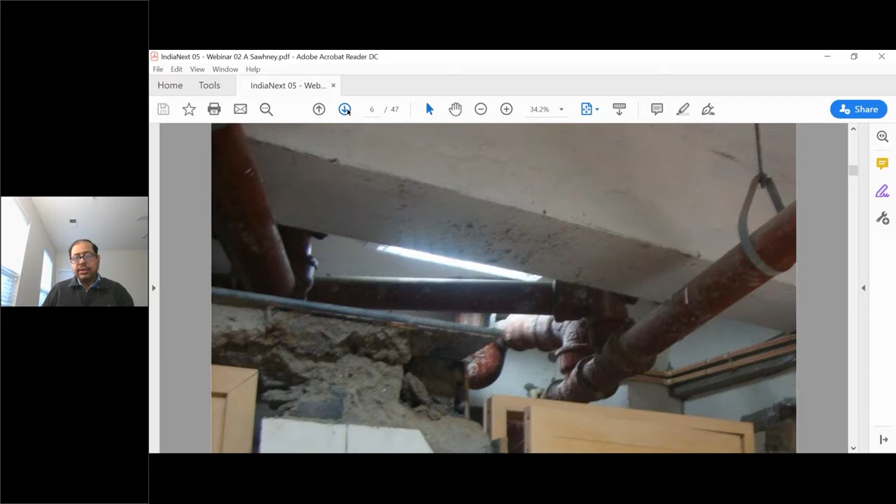The sticks and bricks approach, which we all know has numerous challenges, a lot of rework, a lot of waste, such as this you're seeing on the screen, cannot really continue, because if you have to accomplish the goals set by India in terms of housing units needed, this traditional sticks and bricks approach would not work.

As a sector, we must transform and modernize ourselves. This call for modernization has been a constant calling. It is there to meet the demands of the society. If you have to build so many housing units and other horizontal and vertical projects and assets, there is clearly a need to enhance and improve the way we work.

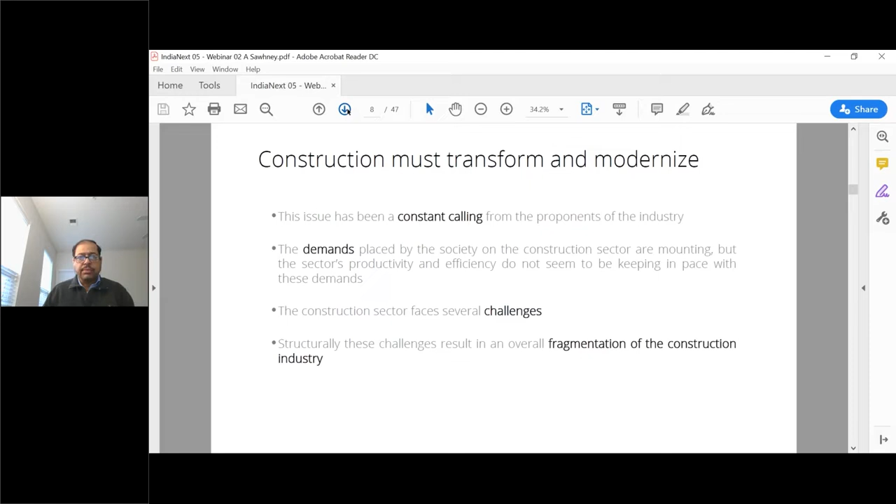The sector itself faces numerous challenges. We have fragmentation within our sector that needs to be addressed also. So, to me, that really translates into transforming our sector.

The transformations that we need in our sector, I divide them broadly into three. We need to relook at, reconsider how we construct or fabricate. When I say that, I also mean how we design, how we construct. So we need to relook at that process itself. We also need to enhance the way we develop and use digital technologies in our sector.

And simultaneously, we must also address how we procure and deliver, because any transformation in design, construction, use of digital technology must also be simultaneously led by improvements in procurement and delivery.

So, is this the answer? Can we continue to tinker and have incremental improvements? Can we have a gold plated wheelbarrow and assume that our productivity gap would change? Will we improve our sector holistically? I don't think that's anymore the answer. We have done all the jugaad and the incremental improvements in our traditional way of working. We must now undertake a much broader and holistic improvement as a sector.

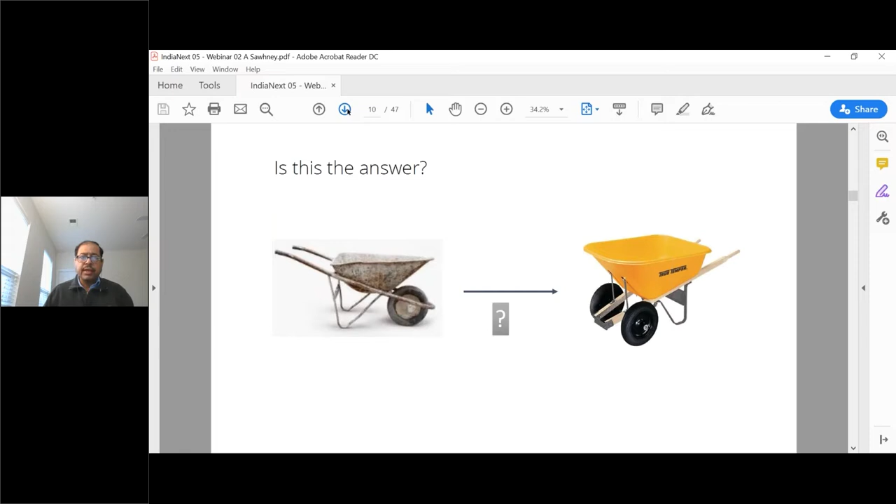And I think that this competition, the IndiaNext challenge, is brilliantly poised to help us rethink. You get a canvas, a fresh drawing board on which you can take some of these ideas, perhaps not all that I'm going to share with you, but some of these ideas, and put them into practice, come up with an innovative, creative idea that creates a sea change and makes the improvement in design, construction, in digital technologies, and in procurement and delivery that we need as a country.

So, what's happening? This is not something that's happened all of a sudden to us. In a way, COVID has played a significant accelerator in the use of technology for our sector. In the past 2 years, we recently did a survey in which we found out that because of COVID, on-site productivity further dropped by about 11 to 20%.

So if you talk to anyone, because of site closures, reopening of sites, safe distance, and many other health and safety measures that are very much needed, have led to some drop in productivity, some drop in supply chain, material prices have increased, and many other challenges have been compounded for our sector.

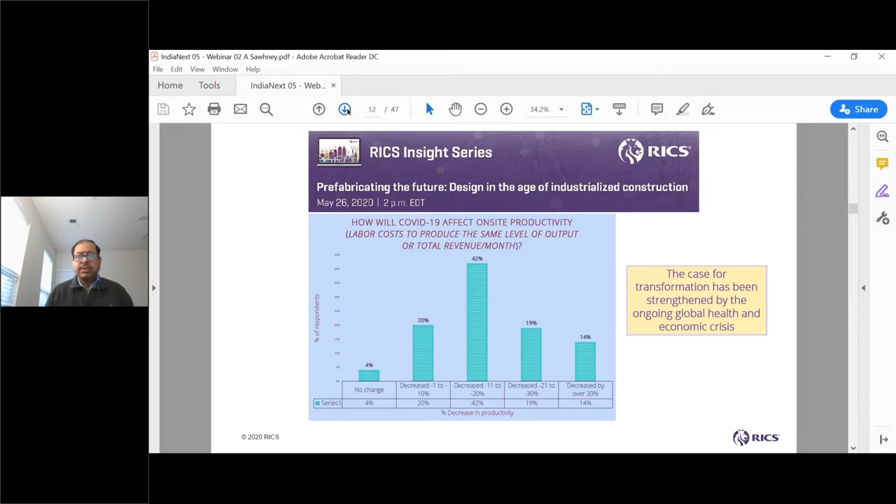So, what we have done brilliantly, I feel, all over the world as a sector, have quickly transformed and adopted sort of these modern methods of construction, adoption of digital technologies, and really started making a good, significant progress.

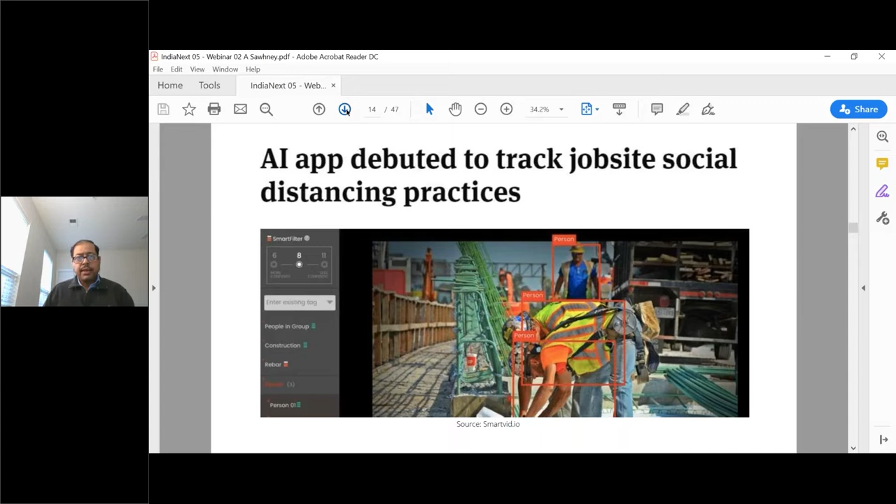There are now artificial intelligence applications taking place all over the job site to do computer vision as well as image processing to make decisions, especially related to worker health and safety. We are seeing virtual inspections take place where physically the inspector does not need to be on site. You can use a laser scanner, 360-degree video to actually inspect the site.

And this was happening, but I think the acceleration is significant. Coincidentally, I found a report which is pre-COVID, and Balfour Beatty talked about how in 2050, likely there will be no humans on the construction site. I'm not sure if I'm completely bought into that idea, but you get the point that we will have lots of remote work that could be done, robots deployed, and other kinds of technology and automation deployed on our sites.

So from a very sticks and bricks approach, already the journey towards a much more modern way of working, adopting a new operating system is already underway, and we are seeing great examples of that take place.

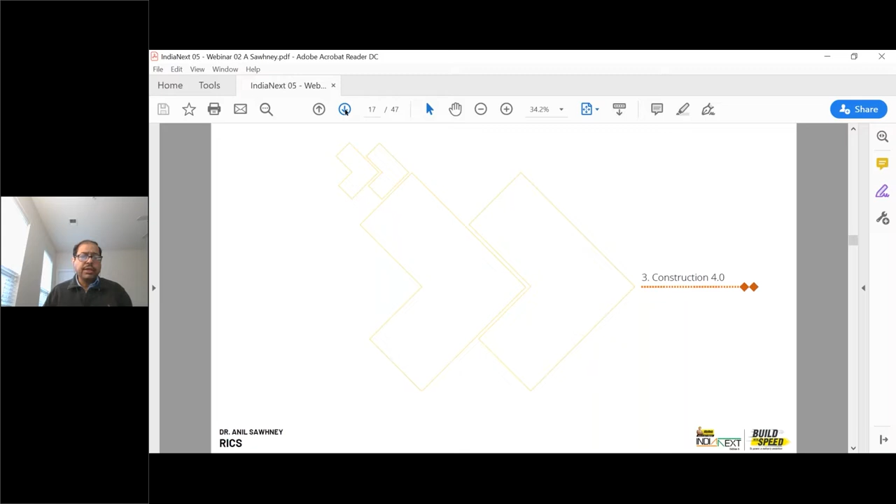So in order to fully understand this transformation, we have come up with this terminology called Construction 4.0. It's a paradigm or an operating system that views the three transformations that I talked to you about earlier on, get connected in a much more holistic fashion. So essentially what we are saying is take what the other sectors are doing, Industry 4.0, adopt and adapt that to construction, and we are calling this Construction 4.0.

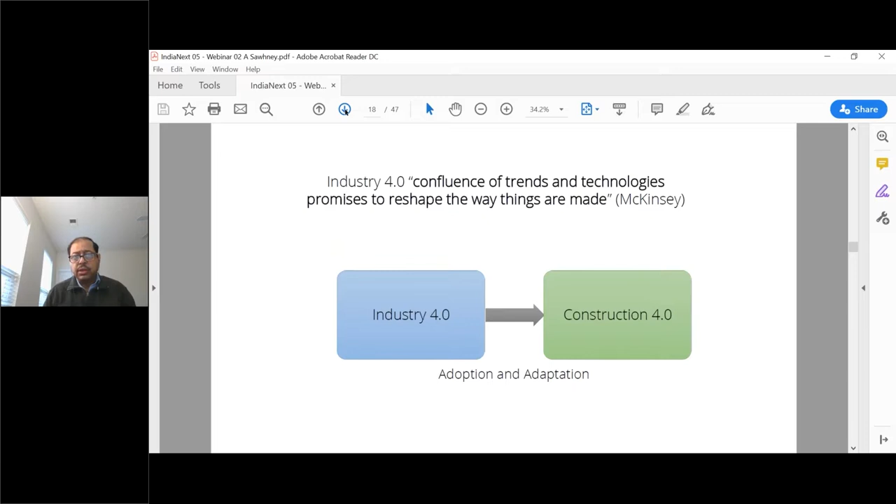You can call it industrialized construction or any other similar term. What Industry 4.0 does, it is essentially a confluence of trends and technologies that promises to reshape the way things are made. So it just changes how you produce various widgets and products. Can we take that high level thinking, adopt and adapt it to construction, call it Construction 4.0, so that we can rethink how we design and construct, how we use technology, and how we procure and deliver?

Our definition of Construction 4.0 is that it is a paradigm that uses cyber physical systems, also now called digital twins, and the Internet of Things, data, and services to link the digital layer consisting of building information model and a common data environment, and the physical layer, which is essentially your asset that you're constructing, but considered over its whole life, to create an interconnected environment integrating organizations, processes, and information to efficiently design, construct, and operate assets.

So in short, what is Construction 4.0? It is a paradigm or an operating system. What does it use? It broadly rests on two technologies: cyber physical systems, and Internet of Things.

How does it work? It works by connecting your digital layer, which is your BIM model or any other virtual representation of the asset you're building, during design and construction, to the physical layer on site. Initially during design there will be nothing there, the physical layer doesn't exist yet, but as it starts coming off the ground, you connect that physical layer with the digital layer.

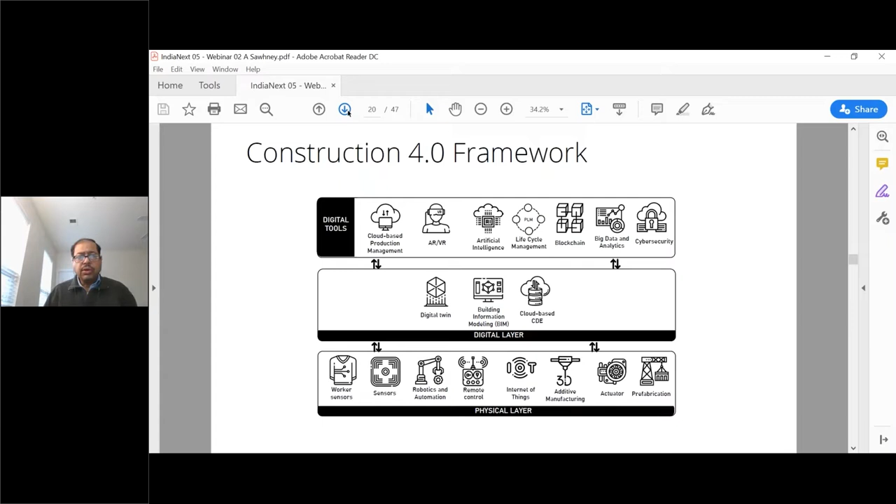Sitting in between is the digital layer. This is the digital assets that you're producing during the design and construction. You could start with maybe a building information model or any other virtual representation of the design of that asset, stored perhaps in a cloud-based common data environment, and slowly people shifting towards the use of digital twins as well in the digital layer. So these three layers are interconnected and are helping shift the way we design, construct, and then hand over, operate, maintain, renew, and end of life our built environment assets. That's sort of the graphical representation of the framework.

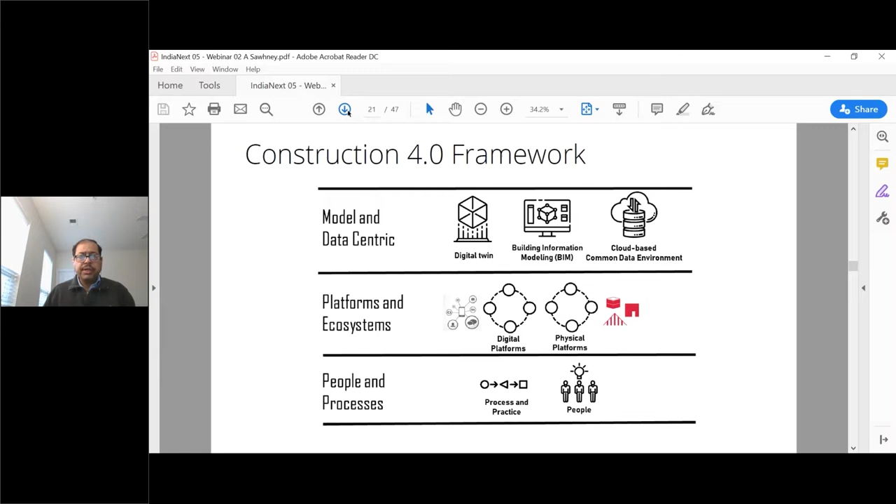The framework itself would utilize model and data-centric work practices. We'll use platforms and ecosystems, and I'll explain further what these platforms and ecosystems are. And then people and processes, which have the fundamental layer of any operating system that you want to have for construction, because without people, no matter how much technology you deploy, really you can't make a difference. So keeping that as the foundational layer of people and processes, the Construction 4.0 framework essentially helps you move in the direction of build with speed and bring about very important changes, much needed changes in the sector.

So you may be thinking this is all sci-fi. I think maybe not many of you would be thinking that, because some parts, some technologies you're already using. But more importantly, you will see the recognition of this in a recent article by IIT Guwahati director, asking why can't construction, architecture, civil engineering that helps shape our society and act as an economic engine for our nation, why can't we be at the forefront of using IT, robotics, AI, and IoT? Why can't these tools and technologies be used to build the basic infrastructure, the social and economic infrastructure for our society? So that tells you that we are already on this journey of utilizing these technologies.

What I present to you is a holistic framework for thinking this through, rather than just embarking upon using BIM or using AI. Why not think more holistically about a paradigm or a framework or an operating system and bring all of these trends and technologies together in a much more systematic fashion? So that's sort of the overview of the Construction 4.0 framework.

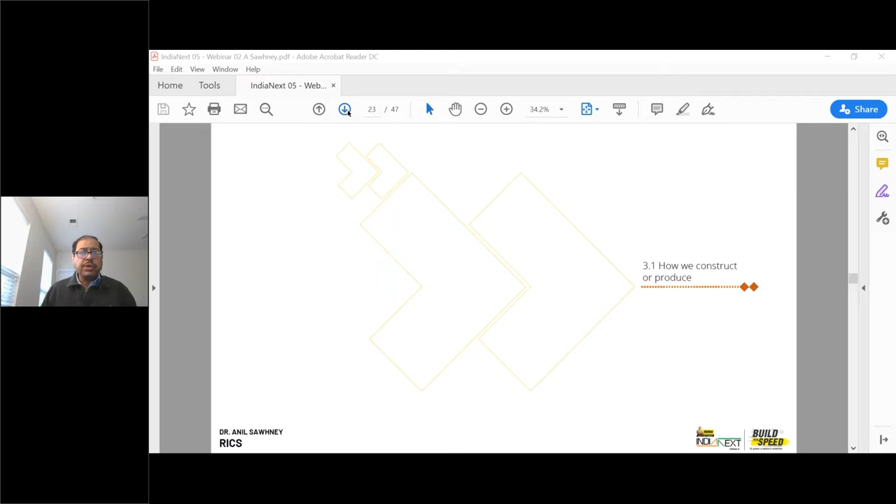So then my first question was, how do we change the way we design, construct, and produce? Really, we need to take a very product-oriented approach, what I call productization.

Let's say we're looking at this very simple, affordable housing block. During design itself, why can't we take a more product-oriented approach rather than designing something and then figuring out what the construction means and methods of that would be? Why can't we upfront utilize a productization approach and think of building in terms of modules that can be repeated, not only on this project, but perhaps produced and used across projects. That's the approach called productization. Some parts and learnings from productization can be used in our sector.

One of the techniques that the manufacturing sector utilizes, you can take shipbuilding, you can take car manufacturer, they all utilize this productization or product-oriented approach. To drive the design in a product-oriented setting, we use something called design for manufacture and assembly. So while you're designing, you're thinking about construction, operation, maintenance, renewal. Our architects, who are already at the forefront of use of technology and innovative thinking, could start thinking in a product-oriented manner and think of modules rather than go down to the sticks and bricks approach.

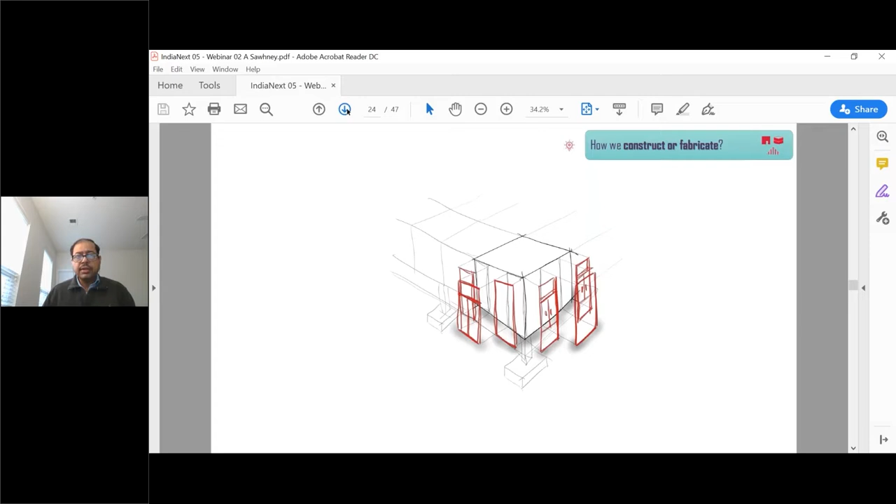Why not think of products that can be utilized? You can think of these products, and I know one of the challenges in India would be remote locations. So you can think of these products, which could be 2D or volumetric, even in terms of transportation—because while I was working with Shailesh in India, one of the challenges was that the infrastructure to do off-site and near-site prefabrication, even the road network, may not exist. So think in terms of transportation while you are designing, even in a product-oriented approach.

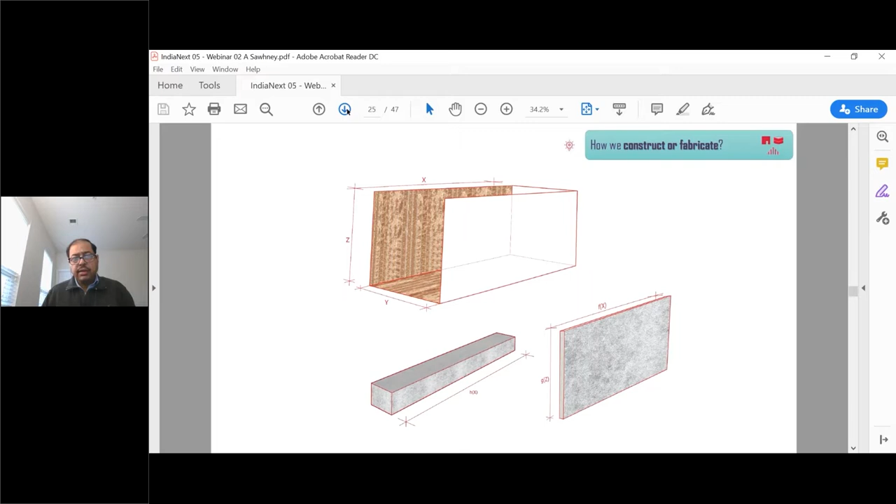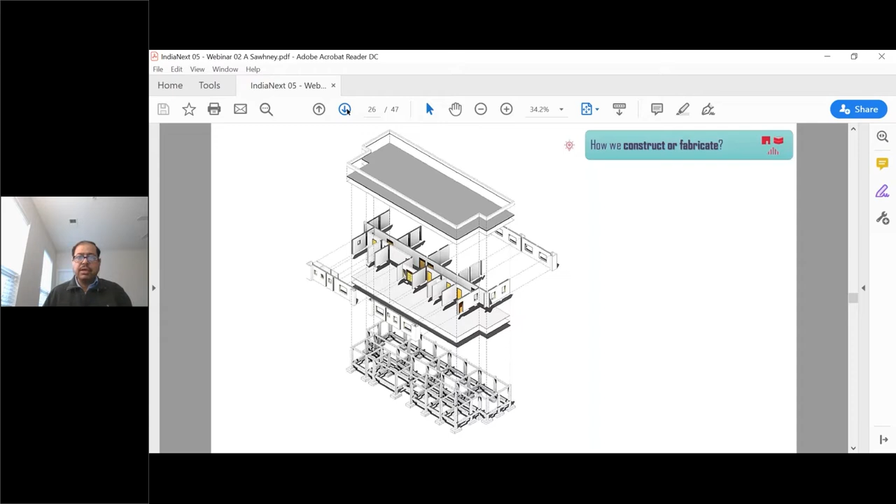So if you had a simple building like this, could this be exploded into parts that can be manufactured either on site, near site, or off site, and then assembled? I'm not saying 100% of the building could be that way, but perhaps we can start increasing what we call the pre-manufacture value of this building—the percentage of the building or infrastructure. Can it be increased? Let's say today we use 10% products, can we increase it to 50%, 75% from a kit of parts, from a productization approach? Can that be accomplished? And if so, would that change how we design, construct, and fabricate?

So this is a project that we did with GAIL, where we looked at one of their pigging stations and came up with this idea of designing with products, designing for manufacture and assembly. You can look at various parts that could possibly be standardized—not all, again, not 100%, but some of it could be modularized, could be productized, and we could shift the way we design, construct, and fabricate.

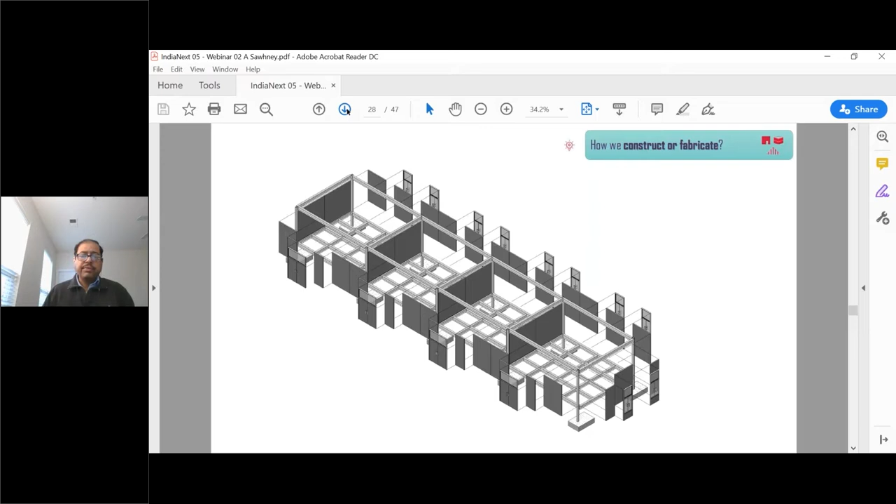We could even look at flooring and roofing components rather than just looking at walls. You could look at volumetric, you could look at 2D panels and other kinds of components. But I think that thinking must be gelled with the way we currently design. So a designer pushing down the road the means and methods of construction—we need to bring that up front and design for manufacture and assembly.

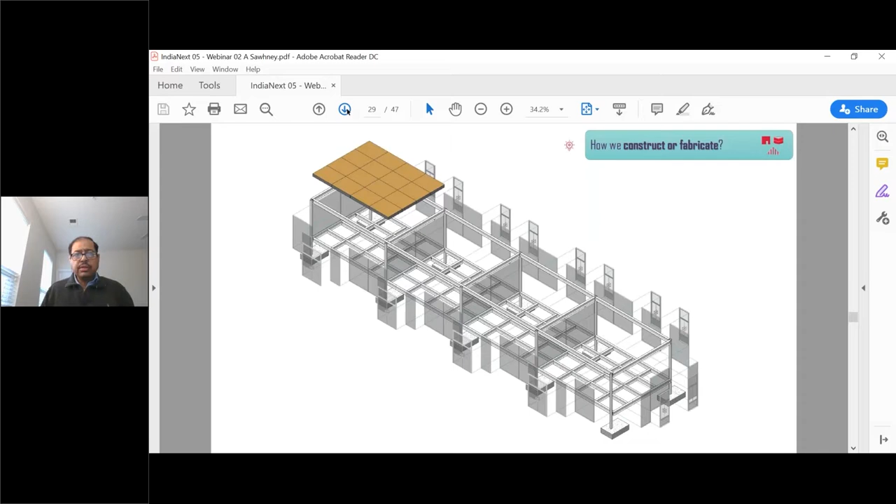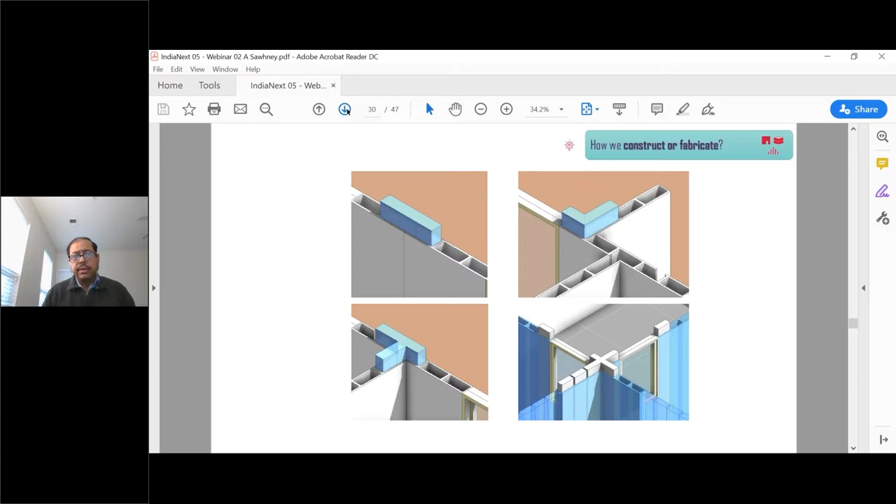You can then also, in this productization approach, design the portion that will take place on the construction site. So let's assume we came up with 80% of the building that could be manufactured off-site. You can also design the in-situ assembly of those components. In this new way of looking at how we design and construct, you can also practically look at the ways of assembling on site in a much more efficient fashion. And this is already happening—it's not something new.

You look at Australia, the Ministry of Education or the school infrastructure in New South Wales, working with two leading companies globally, Mace and Grimshaw—you may have heard of them. They're doing a lot of innovative things, and have come up with a platform essentially of products that can go into a school building. We know school buildings are very crucial. The design of the school building has an impact on the learning and kids' outcomes in terms of their behavior, growth, and learning. So could we possibly look at school buildings and come up with a platform of products, very much like a platform of products that a car manufacturer or a shipbuilder uses today?

If you go to a shipbuilding yard in South Korea, they don't design every piece, every part for a ship. It's already sitting in a product database, and they can configure, combine, assemble all of these assemblies together to come up with a unique, customized ship, for let's say, an oil tanker or a cruise ship.

So could we similarly adopt those design for manufacture and assembly principles and come up with a product platform from which, for a new school building, you can derive these parts and put them together into a really uniquely designed school building? That's sort of the approach in construction 4.0 that we feel is crucial.

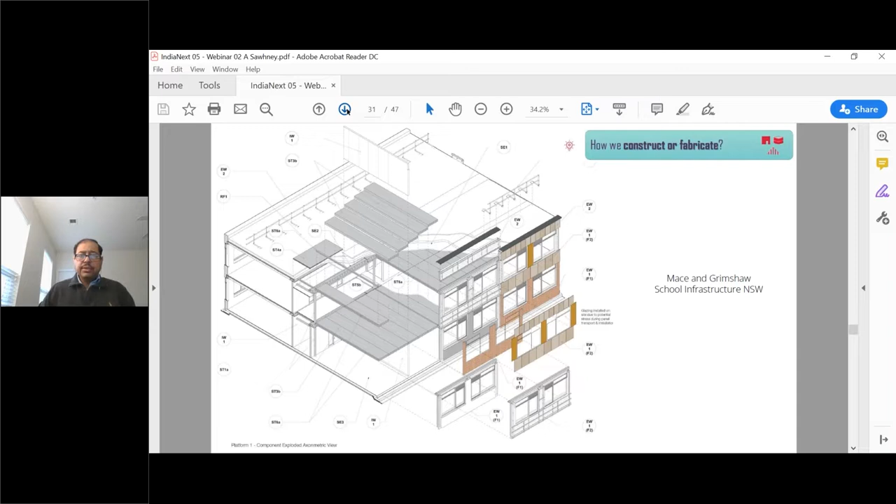Another example, this is the UK government, and they are also doing product platforms. You can have product platforms for various types of buildings. I think the application there is for the Ministry of Justice, for various prisons, jails, and those kinds of buildings. They're working with Bryden Wood to come up with a product platform.

So this is an example of product platforms that can be standardized, which can be combined to create sub-assemblies, and these sub-assemblies can go into buildings and other types of infrastructure to produce built assets that we really want to look at.

So what I'm really sharing with you today is three things: a product orientation or productization, a platform-based approach. Could we look for a subsector within construction? In this particular case, could we look at affordable housing and come up with a platform of products? I call it a physical platform from which we can take those parts and come up with unique housing solutions.

In which the entire process has been thought through from manufacture to assembly to construction, and perhaps even beyond in terms of occupancy, how the asset will behave over its entire life cycle. And thirdly, DFMA, design for manufacture and assembly. Very important. If we were to shift towards a product-oriented approach, could we possibly look at DFMA as a principle that can be utilized in changing how we construct or fabricate?

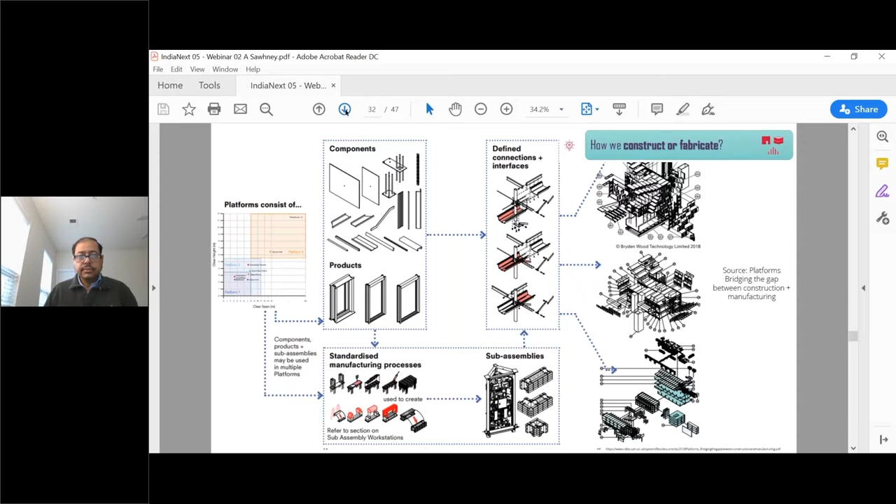So the second transformation that I had laid out for you was, how do we better build digital tools and how do we better use them in our design construction process? I think digital tools together can help us solve many of the inefficiencies and productivity drops that we have in our sector. All of you have seen, India has made significant progress in the use of building information modeling.

Building information modeling combined with a cloud-based common data environment, which is available to various project team members, makes the design and construction process efficient. And today, the discussion has shifted to the use of digital twins. There's sort of a flavor of the month situation, and everyone is talking about digital twins. These digital tools together can be utilized by our sector to bring about horizontal, vertical, and longitudinal integration.

Think of it in very simple terms. Today, data and information in design and construction does not flow over the life of the project. Many a times, design information is inefficiently passed over to the construction phase, and then very inefficiently in the handover process from construction to the use phase of the built asset. If we utilize digital tools in the right way, we can integrate across the life cycle steps of a built asset.

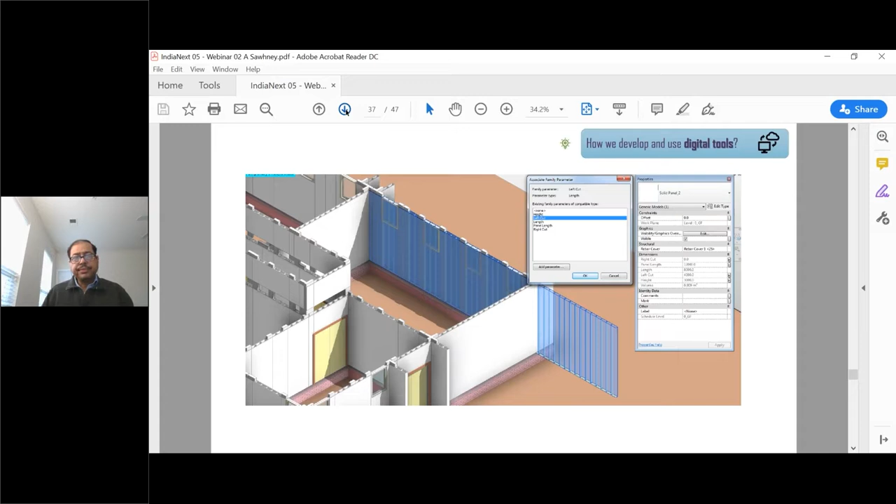Here's another example of how these digital tools come into play when you are designing and perhaps even constructing. As we saw with products, there is this idea of product platforms. You saw how the Australian state of New South Wales is looking at the education sector, school buildings, and using product or physical platforms to improve the design construction process. The same can be done in the digital world also - you can produce digital platforms and ecosystems that can help the way we develop and use digital tools.

Think of this as your Uber, or think of this as your Apple iOS or Android phone. The phone comes with an ecosystem or a digital platform. The iOS today has many add-ons available to you. So if today, for example, I'm an iPhone user and I want to monitor my heart rate, I can buy a physical add-on, I can buy an app, and I can extend the digital tool - my iPhone and the iOS - to do that very thing for me.

If you think about it, it's a platform where a developer can go develop a physical add-on and an app, which is a digital add-on, over that platform and deliver products and benefits for the end user or the consumer. The same approach can be applied in design and construction also. We can utilize digital platforms and ecosystems for the construction sector as well.

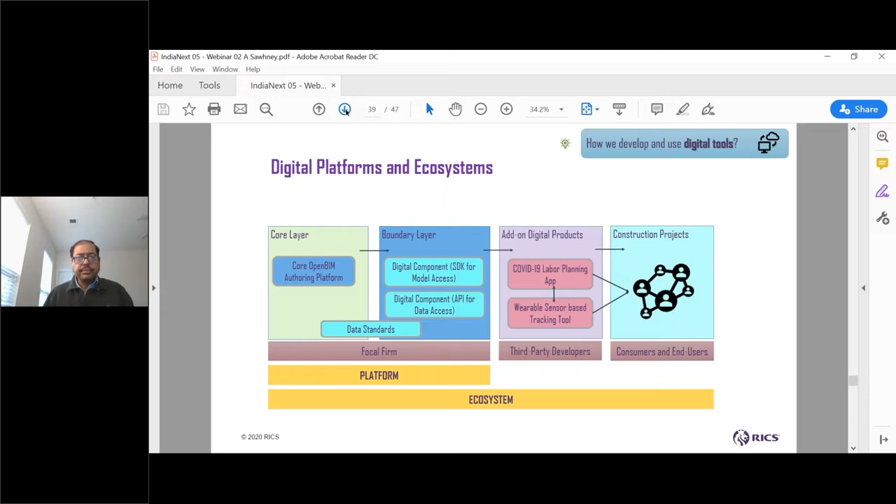Lastly, we raised the third question: how can we improve and change the way we procure and deliver? Because no matter how much innovation you can do in design and construction and in the use of digital technologies, if you can't procure these innovative ideas into your projects, it's going to be very challenging. I think along with the sticks and bricks approach, the lowest bidder or lowest first cost regime must also change. We need to rethink how we can change the way we procure and deliver on our projects today.

Today, we do it in a very transactional fashion, an approach that is very adversarial and causes many of the inefficiencies we discussed early on, because of the win-lose adversarial approach we currently have in transactional ways of working. This can be shifted into enterprise models where you have much more collaboration and coordination.

I know it is difficult to implement on public sector projects. You have various procurement guidelines, perhaps laws and regulations that may make it difficult, but that should not be the barrier to making improvements to the way we procure and deliver.

Obviously, we progress from an enterprise model to a lean delivery model to a much more integrated project delivery model, where you look at value, you look at the whole of life, the whole of the asset, rather than a very microscopic view of let's get it designed, whatever the quality of the design, let's get it constructed, and then have so many inefficiencies and waste in the process that you've lost the very benefits you may have gained from procuring in a very regulated regime.

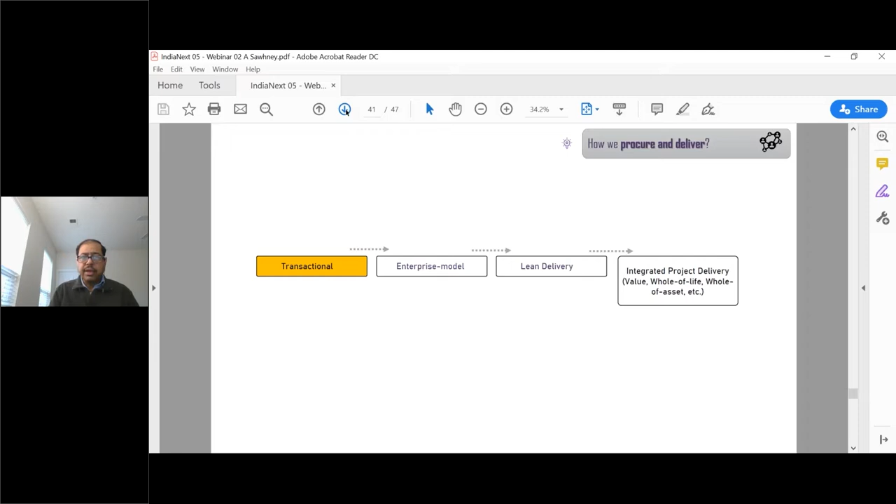So I think some thinking is needed, but obviously this is perhaps very challenging and difficult to accomplish. But that doesn't mean we can't bring in best practices and learnings into this. And some of this is already happening as part of my day job.

My colleagues in the UK are working towards a toolkit which has been launched, called Procuring for Value. So rather than procuring for cost, can we procure for value? In the initial stages, can we take an outcome-based procurement approach to drive our capital program delivery and the lifetime performance of the assets?

Can we increase transparency on the performance of the suppliers and assets? Can we improve procurement efficiencies and get the basics right?

In this particular case, and this has now changed slightly, when you're setting up a large capital program, especially in the public sector, could there be a weighting system where you can look at all aspects rather than just the financial aspects? Could you look at the natural, social, human, and manufactured capitals also, rather than just looking at the money?

Could we look at ways of procuring in which carbon, resource use, production, and productivity are all optimized rather than just looking at the first cost of the design construction process? So that's what I mean when I say how we procure and deliver needs to change also.

My final message is that our sector needs to fire on three cylinders, these three verticals: product transformation, delivery transformation, and digital transformation.

From stick-built construction, we need to shift to modular, prefab, offsite, to a fully industrialized construction. That transformation will be helped by product platforms.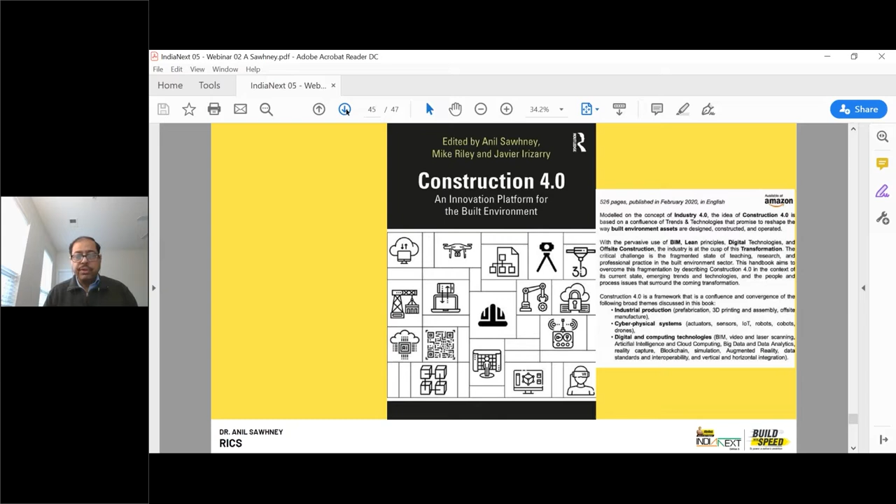And I think with that, I am going to pause and see if anyone has any comments, feedback, questions, or if you want to throw any rocks or stones at me.

Dr. Sawhney, is it possible to conduct the two short polls which you had shared with us? Yes, before we go for Q&A?